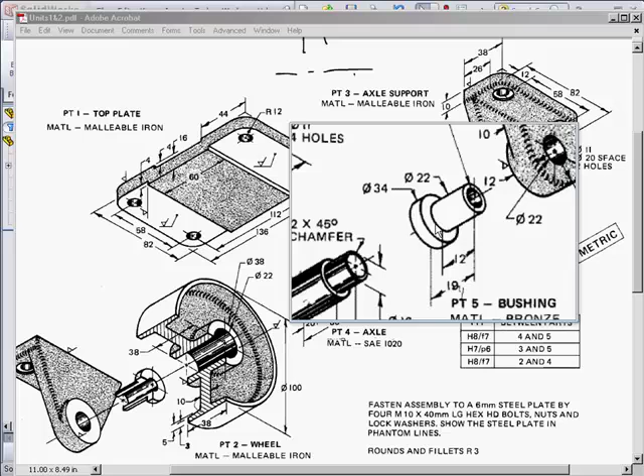In this particular case, I like the idea of putting it right there. I'm going to have it centered on that face right there. Whatever you decide on that, by the way, there's no right answer necessarily, as long as you have a justification for it. Okay, I'm going to go back to SolidWorks.

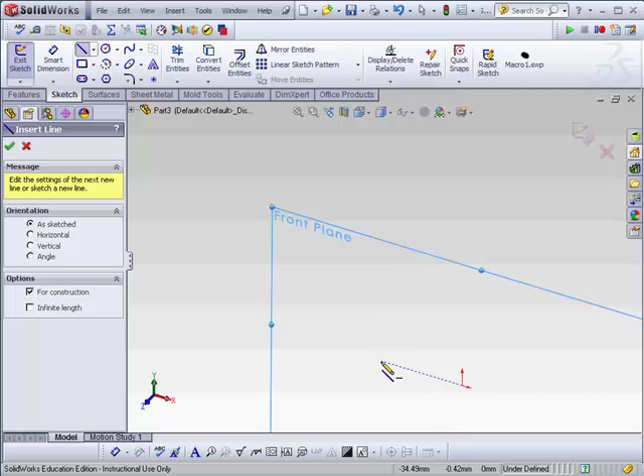I'm going to do my sketch. I'm going to start with the center line. We'll go to the front plane. Could be on the top plane, it would do the same thing. I'll draw my center line so it lines up with the origin. Draw it through the origin so that it turns black. Now I'm going to look right at it in the front.

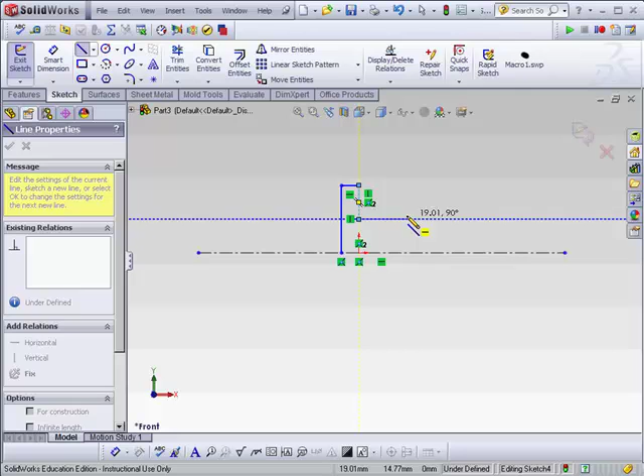I'll start my line. In this particular case, I'm going to start the line over here, go up, go across, come down, come out, come down to about here, and then come across to about here.

Now, I didn't really mean to start this right on the center line, so I'm going to go and trim that little piece out like right here. To trim that little piece out, use the power trim. So now this is floating above the center line because now I can go ahead and do a revolve and have it add that hole automatically when I do it.

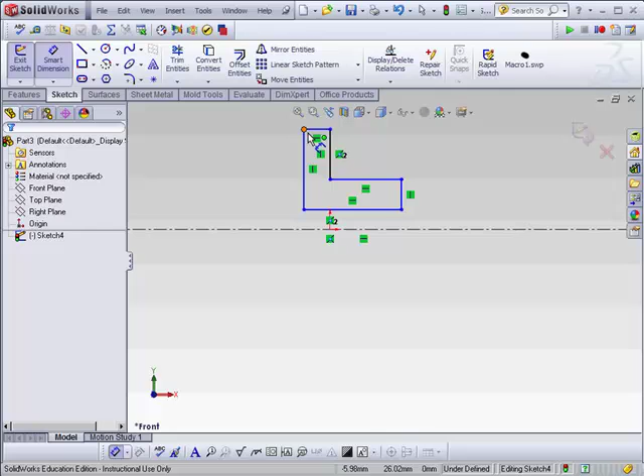Smart dimension, indicate by going down below what the overall dimension has to be of that part. If I go back and look, that's 34. Didn't come very close to that when I drew it, but I think it's going to be okay. It's going to be okay, but not great.

Now, one of the things that just happened, we'll just go back out of the dimension mode, is that when I did this, I didn't sketch it close enough to the 34 to avoid having a kind of major change. So now I'm going to come back and move that up. Come back and move this down so it's a little closer to what I want. Go back and take a look at the sizes.

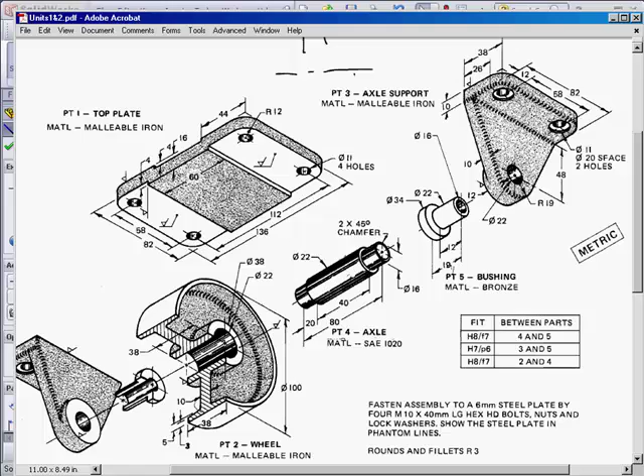22 millimeters for the diameter of the inside piece, and then 12 and 19. So smart dimension from here to here. Go on the outside. 22. From here to here. Do the same thing. That diameter should be 16.

Now there's your bushing profile, almost completed. Yes, it is 16, I just wanted to check that out. So now we have the overall length.

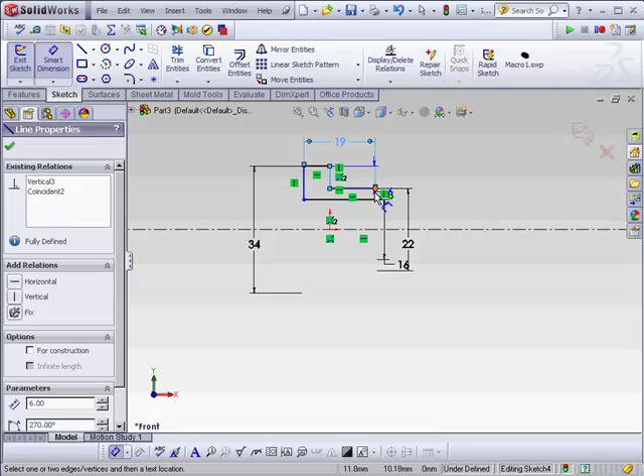Well, in order to place this on the, to make sure that it's right on the origin, I'm going to have to do something to constrain its location. But first, let's do the overall length. The overall length on this, 19. And then the distance from here to here, going to be 12. Bring this back out again.

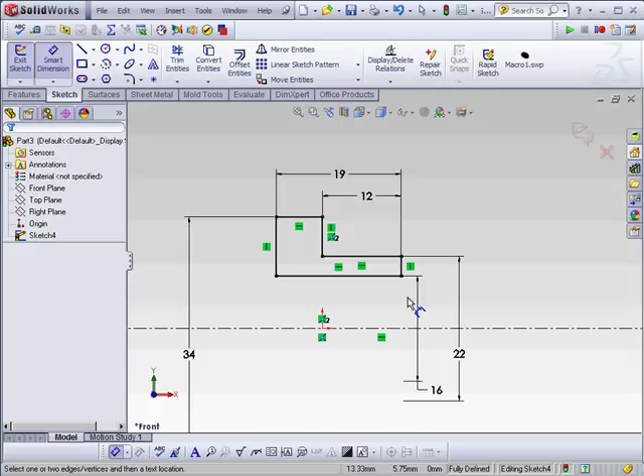Okay, now it is fully defined, and the reason it's fully defined is because that line right there is coincident with the origin. We picked that coincident relation. You notice that it changes color down here and changes color up here. So we actually did line it up on that origin. That's why it's fully defined.

Now we get back over to the features, do a revolve base. It automatically revolves it around the only axis it has, which is that center line. There's your bushing. Again, you could have done that as a solid and put a hole in it, but this is a nice quick way to get that geometry.